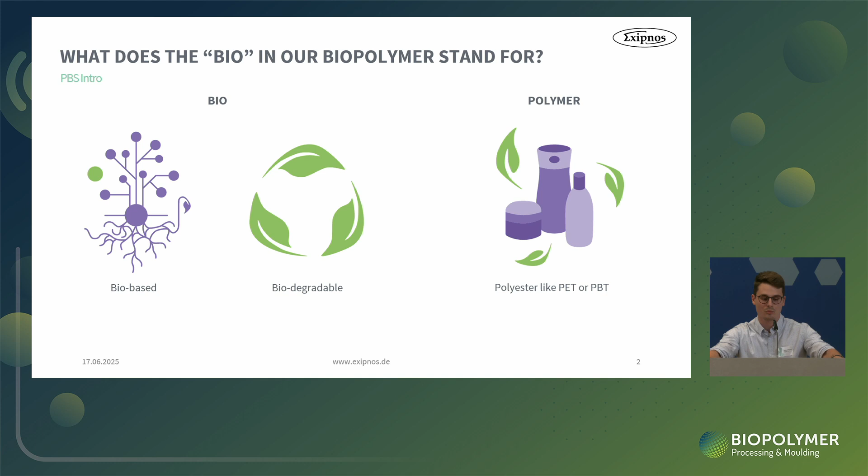So in the end, there was a bag left, and he thought, okay, it's the last trial for the day, and he put it in the injection molding machine, and suddenly it worked. Automatically the parts came out. And this was the start of our biopolymer journey with PBS. Wait a moment. Yeah.

Polybutylene succinate. I think many of you have now heard everything about this material. I will give you a short introduction about it from our side. Like Dr. Hess mentioned already, the 2 monomers can both be bio-based and biodegradable. When we receive the material, we make our compounds. After that, it goes to the customer, and he makes his application. And then you can see this possibility that we have here, that PBS is also recyclable.

So when the application is damaged or not useful anymore, there is this part. And there is a part missing, but I will add it for you. It's the biotechnology cycle. Later on, I also have a video to share with you showing how you can cut the polymer chains of the PBS compound, and in the end you have the pure monomers left, and with these monomers you can then produce PBS again, and after that the compounds which we use to make the application.

And the last one is the biodegradable part. As everybody knows already, we produce the compounds for the plant pots, and when you put it in the ground, after a few months it's completely gone. And this is the advantage point for PBS, because the first two cycles, the long-life article or the recycling part, are already available for many conventional materials. But the two other points, the biotechnology cycle and the biodegradable, are a unique point that PBS has.

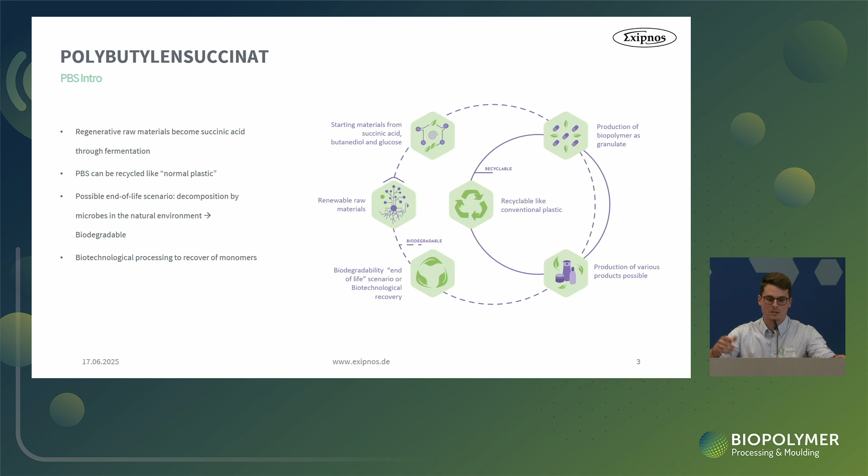And I think the next one is, yeah, exactly. So we started Rubio, and it was very successful. And after that, we thought, okay, what is the follow-up project? And we had a new vision. This is the compact production system that we want to start in the middle of Germany. And we created a vision for all of you. Here you can see the plan that we want to have in a few years in the middle east of Germany, because we have all the things here.

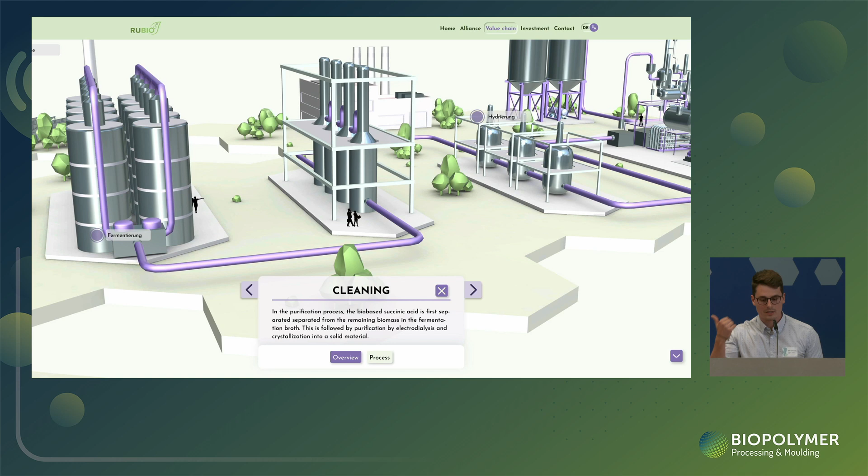So we have Uhde Inventa-Fischer, who can build this product line, but we also have the raw material, like the biomass. After that, it goes into the fermentation, which we also have here. After that, it goes to the cleaning. You have to clean the monomer, and after that comes the hydrogenation. And the next part will be the polymerization, where you combine the two monomers, butanediol and succinic acid.

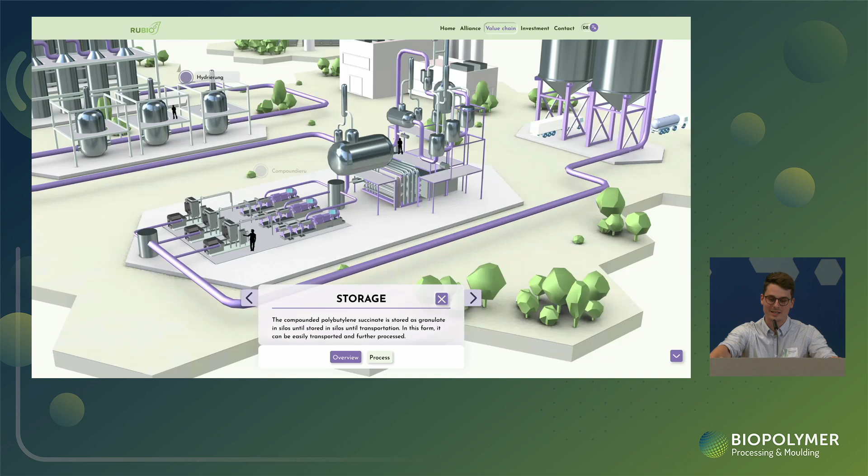The next is also a big, important part. It's our part, the compounding part, where we develop the compounds. And we also have, in all this Middle East area, the customers who can produce this application. So this is our target for the next few years, because we have many additives already here in Germany or in Europe, but as Mr. Pawlikowski already mentioned, the plants where PBS is produced are mostly in Asia. So we have really high transport costs, and our plan for the future is to have this PBS also here in Europe, ideally in Germany.

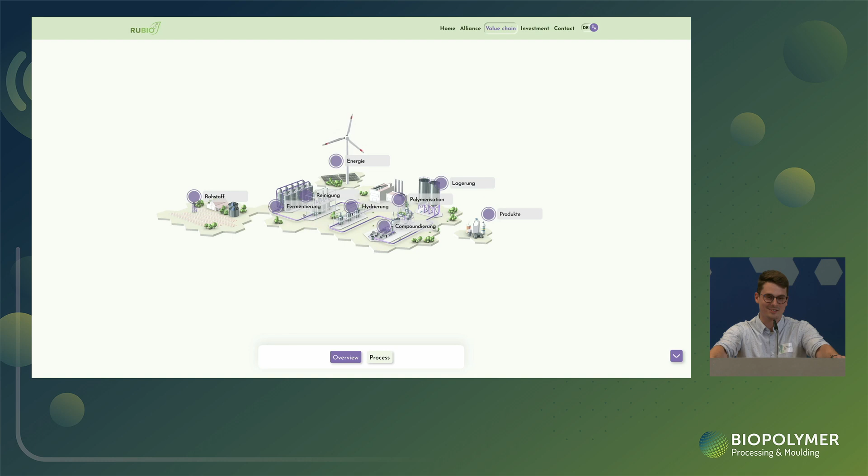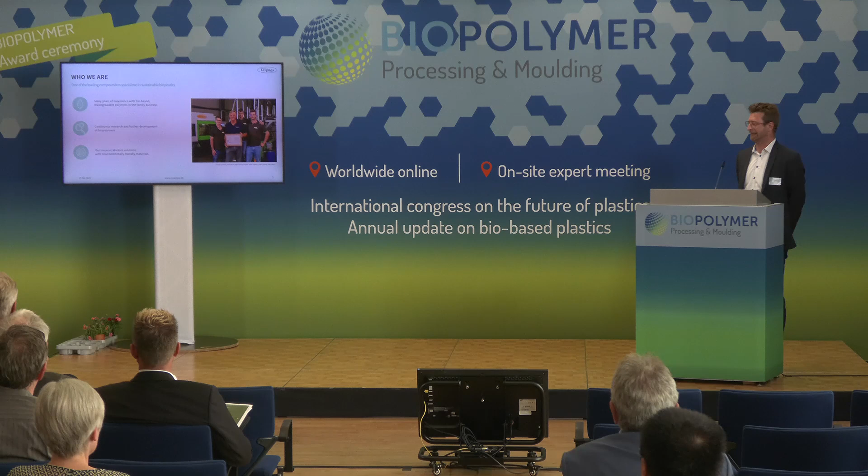So, and I think now it will be my brother. Continue. Yeah, I will tell you something about our family. Who are we? We have been on the market for more than 100 years, in the 4th generation of plastics. Also, we do a lot of R&D, as my brother already mentioned. So our part is to generate new compounds for different applications. Also some R&D projects to generate new compounds. We are open for it.

Dr. Hess told a bit about our next slide. We have heat resistance, as we already heard, of about 114 degrees. This is pretty good for most of the applications. If you see the cups at our booth, you can put them in the dishwasher and everything is good. Also, we can already produce 100% bio-based and biodegradable compounds. Colors are no problem for us. We also use natural colors, or if it goes into other applications, we can use normal masterbatches as well.

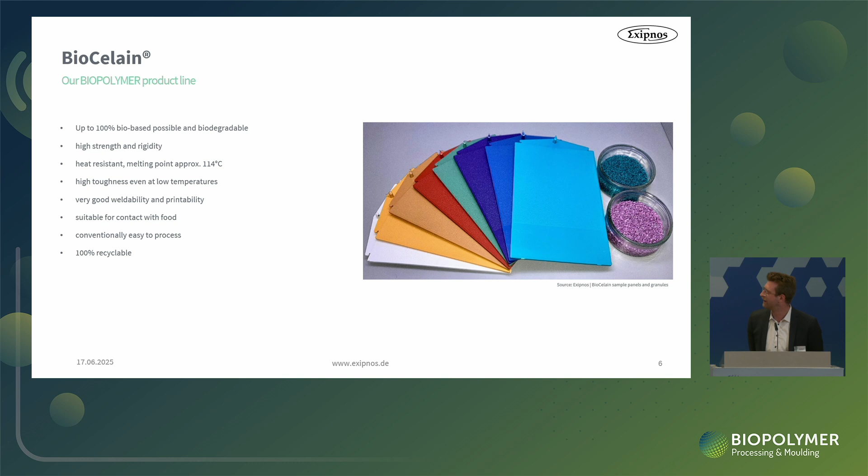Okay, we are 100% recyclable, and this is pretty good, but if the application or the part goes into the environment, it will be gone after a few years. We say per millimeter of wall thickness, it takes around 1 year, and then the material is gone. Here is a short product line overview of what we did in the last years. The main topic was to set a melt flow rate. That means we have a melt flow rate from 1 up to nearly 100 for different applications.

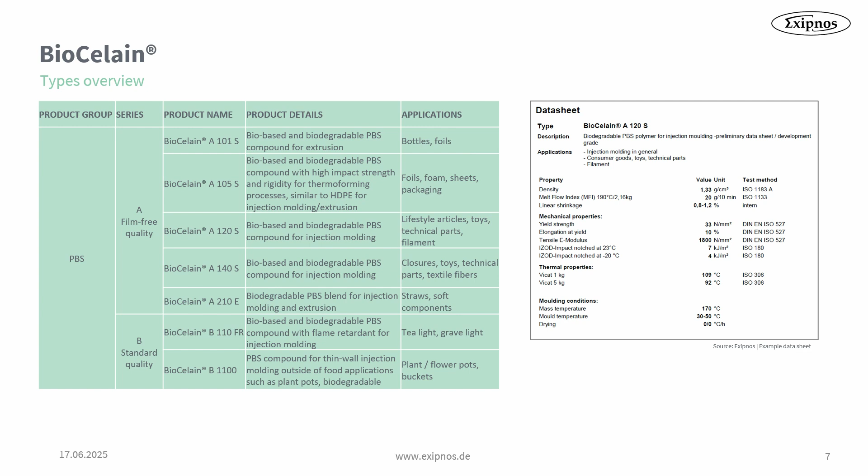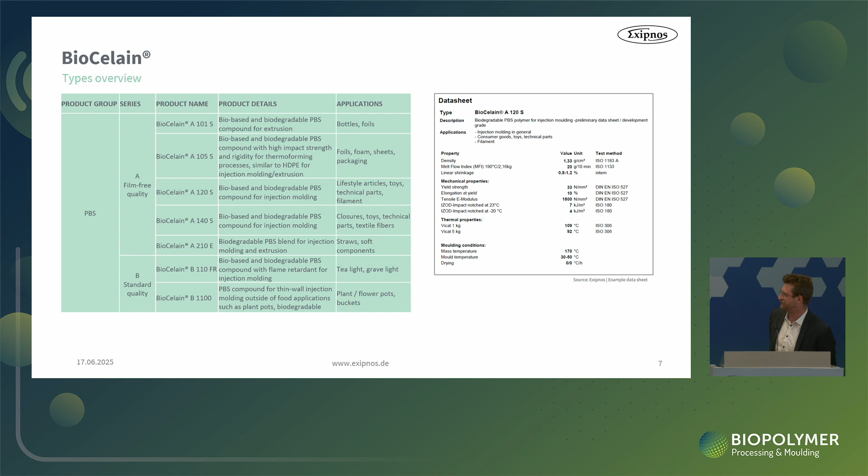If we go for the lower melt flow indexes, we can use it for extrusion grades or extrusion applications. And if we go for the standard, it's the 120 or 140. These are our main products for injection molding parts. You can see the parts at our booth in the foyer later on. What we did already: our materials are already commercialized. We heard about the flower pots, we saw them already. We have the cups. We have some foil. We can make bottles out of the material, and this is just a short overview of what we can do with the material.

This is our newest grade. We have worked for around 40 years for the automotive interior part, and now it's pretty close that we try to get the PBS also in the car. My father and my brother are working hard on it, so that the material fits the automotive standards. And I think we are on a pretty good way.

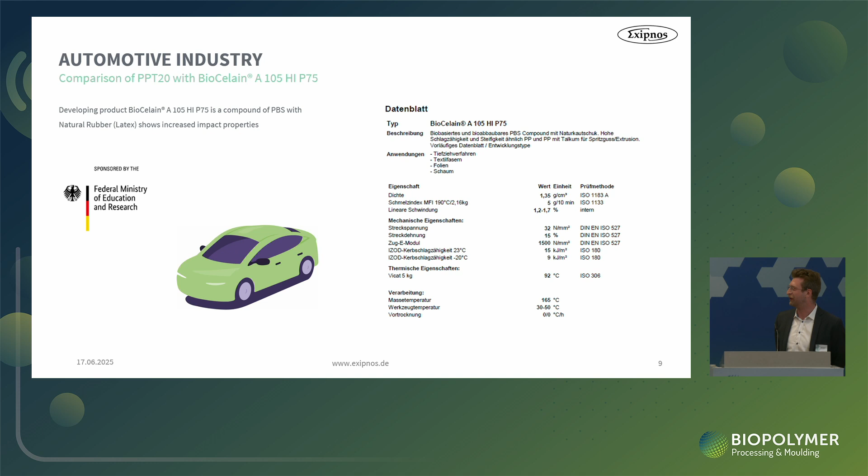For some OEMs and tier ones, we will make some parts from our material in the next month, and then we can test it and see how it works. So one point about this automotive compound is that this came out of a funding project together with the Fraunhofer IMWS and PSM Polymer Service in Merseburg, where our plan was to increase the impact resistance of the PBS. So we started with latex, with rubber, to add it in our PBS.

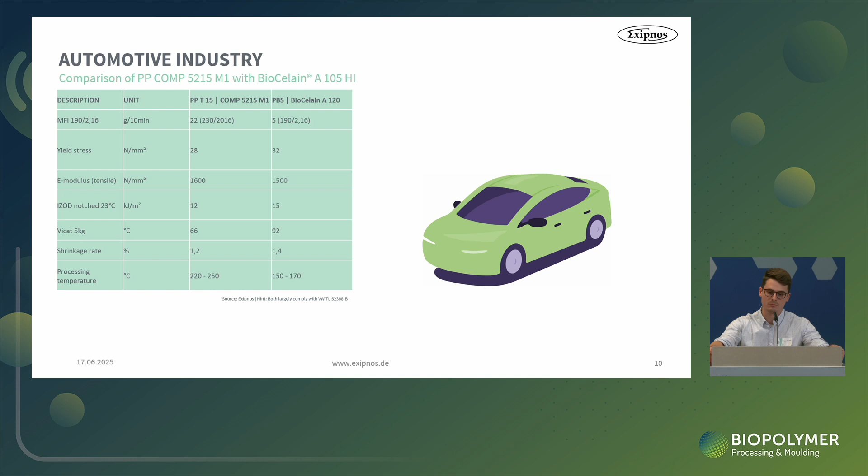And now you can see, when you compare it with a classic PP T15, which is in the car, that we are in many areas quite there. So this was the vision and the target of this project. And another thing of PBS is the PBS matrix, it's really flexible, and this is an SEM from the Fraunhofer IMWS, where you can see that the latex particle fits really well in this PBS material, and this was why the impact resistance was so good in the end.

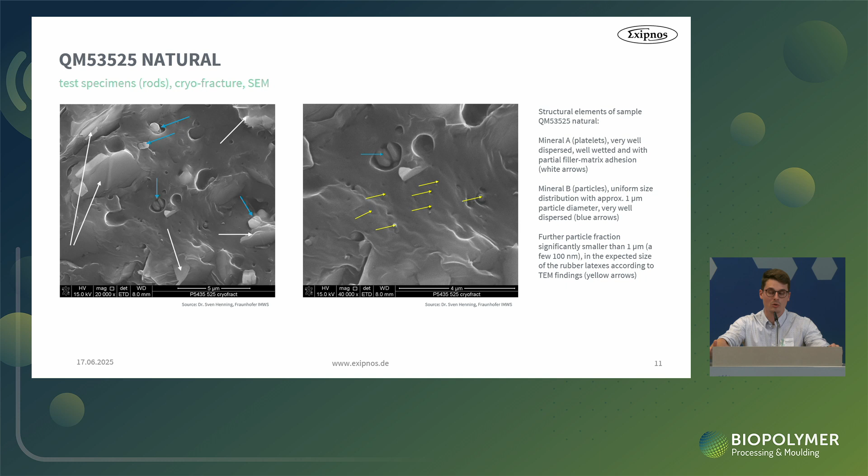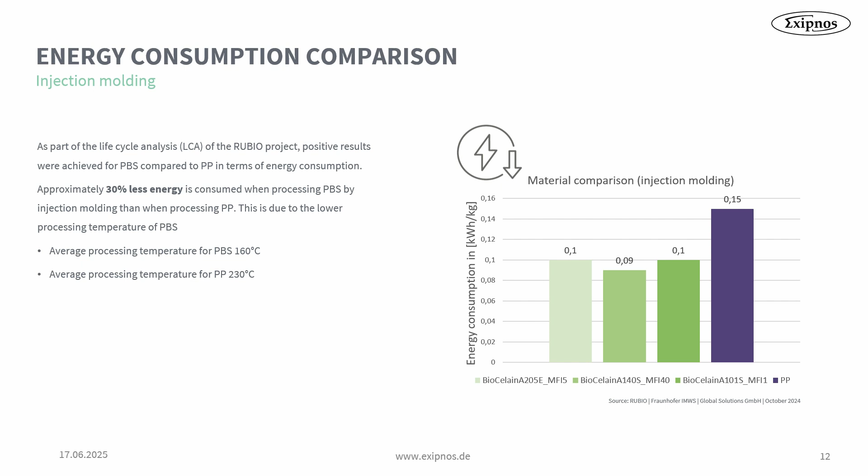This is one point when you say, okay, you have maybe a good compound for the automotive industry, but then you have to see if you find other important points. And another point is the energy consumption. During our Rubio project, we also had an LCA task where somebody was at the factories, installed his machine and checked the energy when you produce PP compounds and PBS compounds. And we found out that we use less energy when we produce our compounds with PBS compared with PP.

And I have a short, nice story, because last week we had a trial in another country to produce some application, and I sent him the parameters to produce the material, and he called me back and said there's something wrong, it cannot be right. I was a little bit confused and asked him what the problem was. He said there's something wrong with the temperature, it's too low. He thought you cannot produce this application between 130 and 190 degrees. And I said, yes, it's possible.

He was so confused because he only worked with PP, and with PP you have to work with 220 to 240 degrees to produce the material. After the trial, he called me back and said he was really surprised about the production line, because we can produce with less temperature. And this is also a big advantage for the automotive industry, that we have bio-based and biodegradable parts, and you use less energy for them.

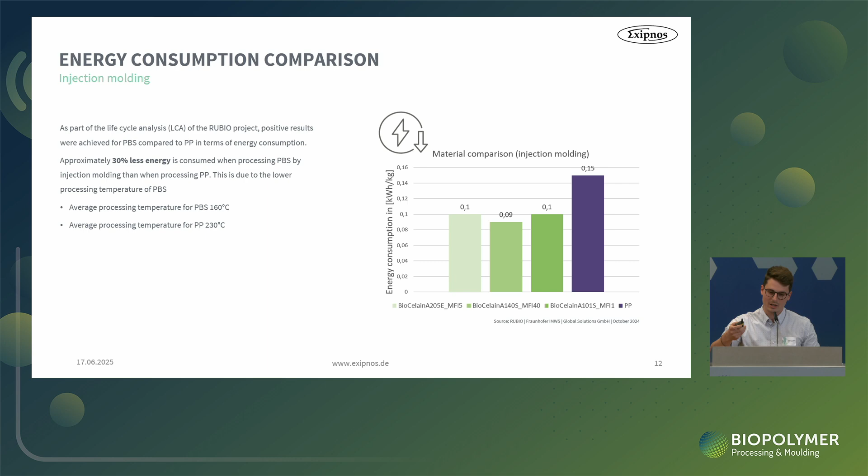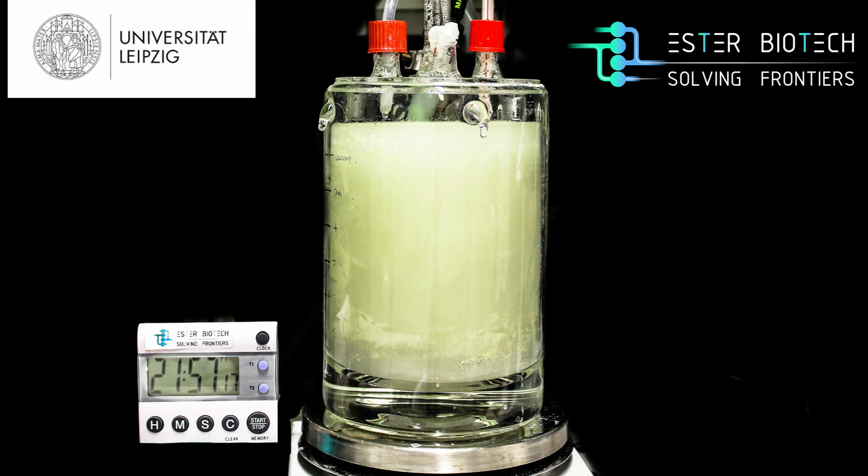So it's not realistic that you have your flower pot and after 29 hours it's completely gone. But we wanted to show that it's possible, and it's transparent. Here you see the separated monomers, and down is the filler, and this can be done with our flower pot. So in the end, when you have the flower pot, please put it in the ground, and after some time it will also be completely gone.